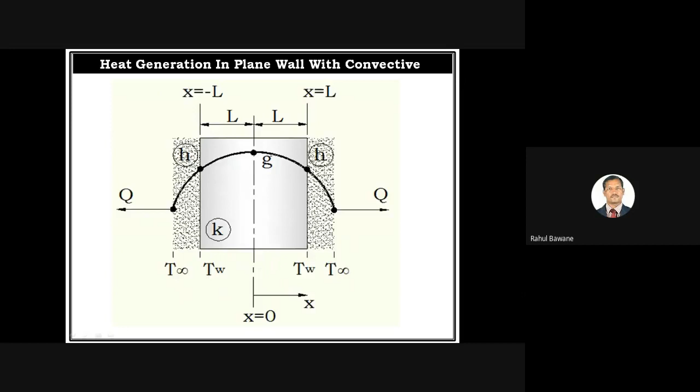Let's see now how to derive the equations, the mathematical expression, for such a condition. So this is our schematic. Now at the center, where we assume x is 0, the distance is 0.

So at the center, T will be maximum, because at the center only there is a heat generation source. At the source, temperature will be maximum, and from this source heat will convey out to the surrounding fluid. So the first part is conduction, then convection. On the right hand side also, the first part is conduction up to the surface, and then from the surface, convection.

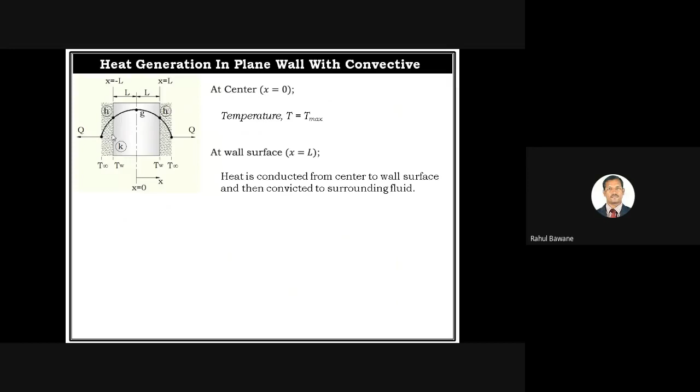So no doubt the temperature will be maximum at the source only. So at the center, where x is 0, temperature is T max, and at the wall surface — it may be either left or right side, at a distance L, so x is L distance on both sides — heat is conducted from center to wall surface and then convected to the surrounding fluid. So heat from the source is conducted throughout this slab and reaches the surface, and from the surface it is convected out to the surrounding fluid.

So at the wall surface, what is the condition? Heat conducted to the wall surface must be equal to heat convected to the surrounding. So for the conduction part, as we know, we use Fourier's law: minus Ka dt by dx at x equals to L. And for convection, we use Newton's law of cooling: Ha times Tw minus T infinity.

Now in case of a slab, whatever be the cross section area for heat flow is exactly the same as the area exposed for heat convection, so this A gets cancelled. So our final form will be: minus K dt by dx at x equals to L is equal to H times wall temperature minus T infinity.

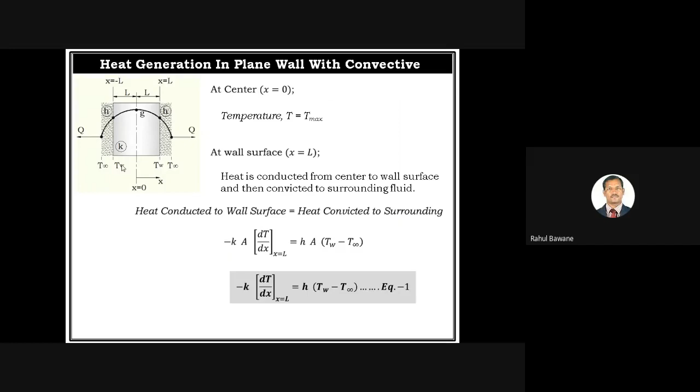Here we are not assuming left side or right side because both wall surfaces remain at the same temperature. So this is our equation 1.

Now in this, K is a constant, that is thermal conductivity, H is convective coefficient, T infinity is the surrounding fluid temperature. So we must find out the terms which are going to change condition to condition, that is dT by dx at x equals to L, and T wall surface. So we have to find out these two terms.

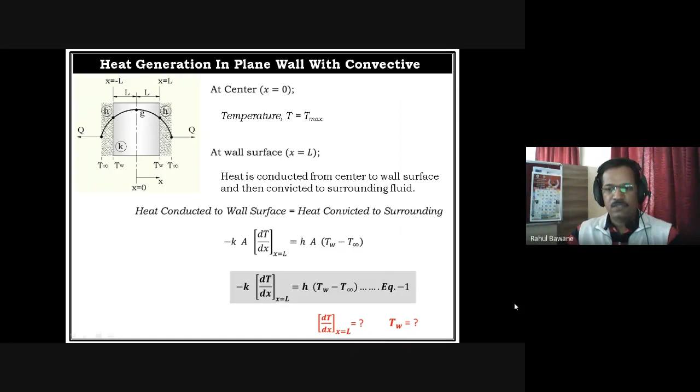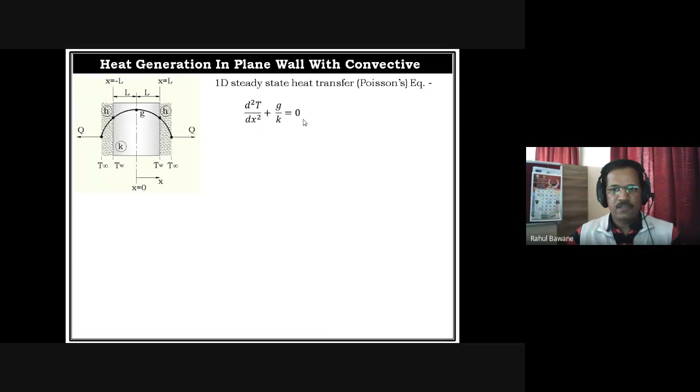Now as I said in the previous video, this portion as per university syllabus is covered only on the basis of one-dimensional steady-state heat conduction equation, that is Poisson's equation. So Poisson's equation is d square T upon dx square plus G upon K equals to 0. Why 0? Because steady state, so delta T by del of time will be 0, so everything becomes 0 in the three-dimensional heat conduction equation. One dimensional, so y and z terms are not considered, so our final one dimensional heat conduction equation is d square T upon dx square plus G upon K.

Now I will shift this term on the right hand side, so it becomes minus G upon K.

As I said, we must find out dT by dx at x equals to L and T wall. But right now what we have is d square T by dx square. So anyhow we have to convert this into dT by dx, and secondly T, that is for T wall.

So integrate this. On integrating, it becomes dT by dx, so the higher square term gets cancelled. So after integration of d square T upon dx square, it becomes dT by dx. On the right hand side, integration of this gives minus G upon K of x, and plus C1, constant of integration. So this becomes a dT by dx form, but still we have to find out the temperature form.

So again on integrating this equation, we reach this form. Integration of dT by dx becomes T equals to minus G by K, integration of x becomes x square upon 2, plus C1x plus C2. So this is C2, again a constant of second integration.

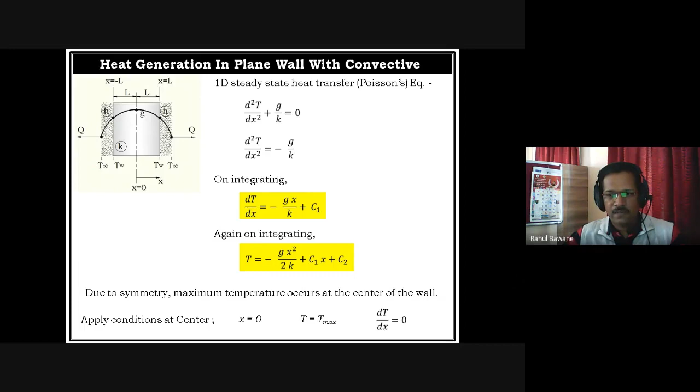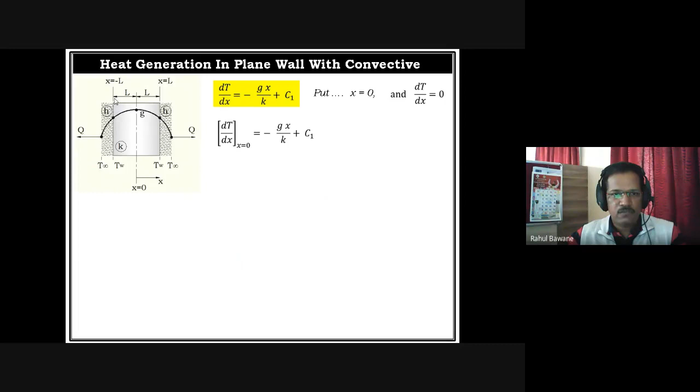So let's start. We have dT by dx equals to minus gx upon k plus C1. Put at x equals to 0, maximum temperature condition, dT by dx becomes 0. So dT by dx at x equals to 0, this is the notation we are considering, because dT by dx can be considered at surface also, where x equals to L. Right now we are considering x equals to 0. So dT by dx at x equals to 0 is equals to minus gx upon k plus C1.

Now dt by dx at x equals to 0, value is 0, that is the maximum temperature condition, is equals to minus x is 0 plus C1. So ultimately we get C1 equals to 0. We got the value of C1, numerical value, it is 0.

Now at center, when x is 0, dt by dx becomes minus gx upon k. Why? Because C1 is 0. If I put this C1 in our general equation, C1 becomes 0, so dt by dx will be only minus gx upon k. When I talk about center where x is 0, that equation becomes minus gx upon k at x equals to 0.

In the same way, at wall surface where x is L distance, I am not considering minus L or plus L, just a wall surface on left surface or right surface. So when x is L, what happens to dt by dx? dt by dx at x equals to L will be minus g. We are replacing the x term by L only, so gL upon k. This is the dt by dx at x equals to L.

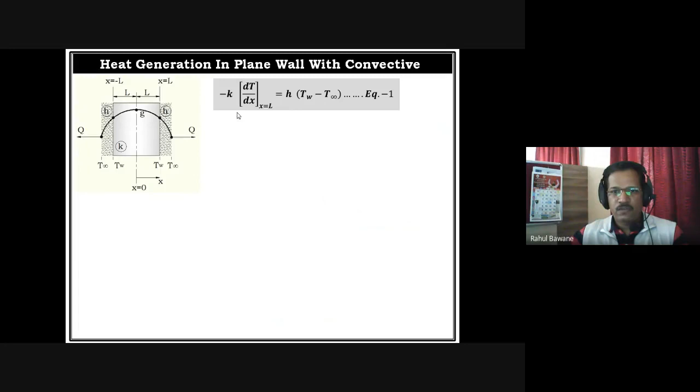So we are not finding at center, we are finding at x equals to L. So wall surface is minus GL square upon 2K plus C2. Now our general equation, where we find out value of dt by dx at x equals to L and T wall, put these values. So the equation becomes minus k in bracket, dt by dx value at x equals to L is minus GL upon k, equals to H, and this is whole bracket. In this stands for T wall minus GL square upon 2K plus C2 minus T infinity.

Now we already find out the value of C1, that is equals to 0. We have to find out the value of C2 now, in terms of any numerical value or in terms of other parameters which will be provided in numericals. So if I shift and rearrange this, minus minus becomes plus, so k GL upon k, k will get cancelled. H here, bracket remains as it is. Now I am shifting this H to left hand side, k gets cancelled, so it remains GL upon H equals to minus GL square upon 2K plus C2 minus T infinity.

We are interested in finding C2 value. So shifting everything, this whole minus term, if I shift it to left hand side, it becomes plus, and minus T infinity shifted, it becomes plus T infinity. So we get the value of C2 in terms of other parameters. C2 will be GL upon H plus GL square upon 2K plus T infinity. This is the value of C2.

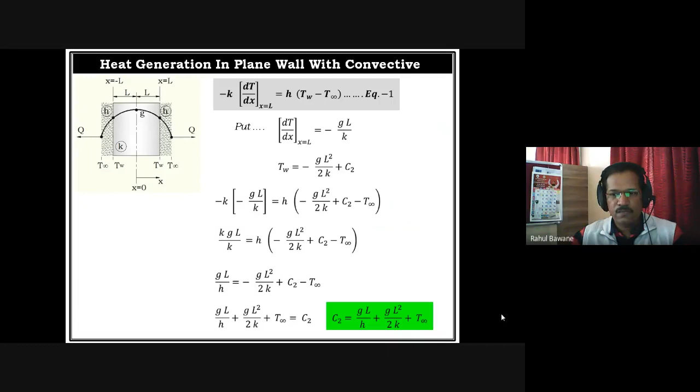Now we know what is the value of C1 and C2. So our temperature profile in terms of constant of integration C1 and C2, this is our temperature profile. This equation belongs to this curve. This is called the temperature profile equation T.

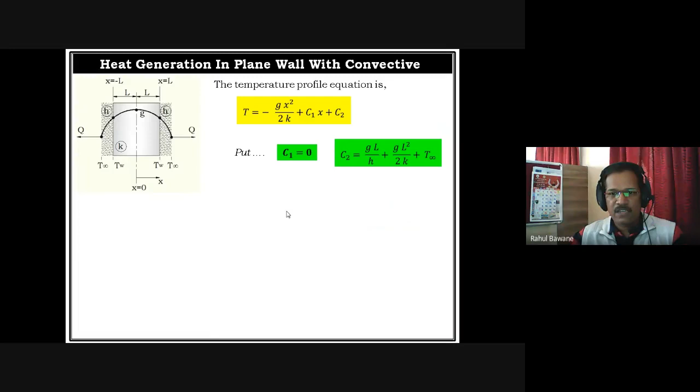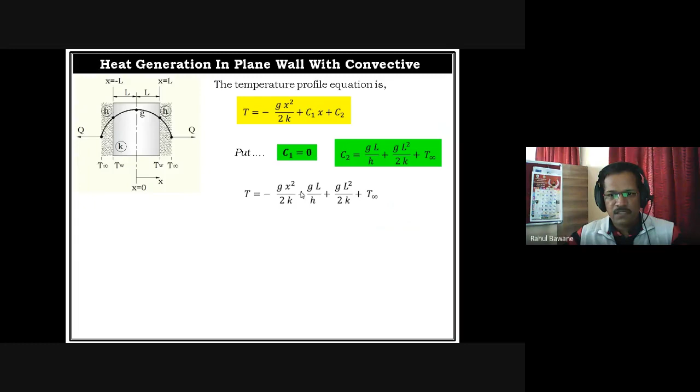Now we have to put the value of C1 equals to 0 and C2 equals to this in our temperature profile equation. So our temperature profile equation, where minus gx square upon 2k remains as it is. If C1 becomes 0, the whole middle term becomes 0. Then C2 plus GL upon H plus GL square upon 2k plus T infinity.

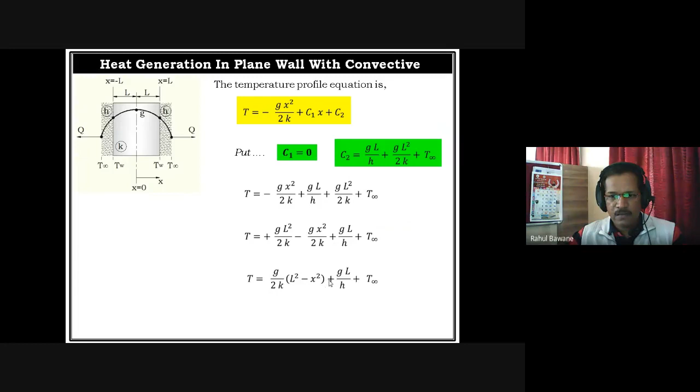Now rearranging this, I shift this term to the first position, minus of this x square term, plus GL upon H plus T infinity. Now in these first two terms, G upon 2k can be taken common and taken out. So it becomes G upon 2k times (L square minus x square) plus GL upon H plus T infinity. So this is our required temperature profile equation. This is our standard equation where there is no term of C1 and C2. So we ultimately succeed to remove out the C1 and C2 constant terms.

So our final temperature profile equation will be T equals G upon 2K times L square minus X square, plus GL upon H plus T infinity. This equation is used to calculate the temperature at any distance within the slab.

So if X is 0, we find out the temperature at the center. If I put X equals to L, then it will give the wall temperature. If I put some value of X, we will get the temperature at that particular X value within the slab.

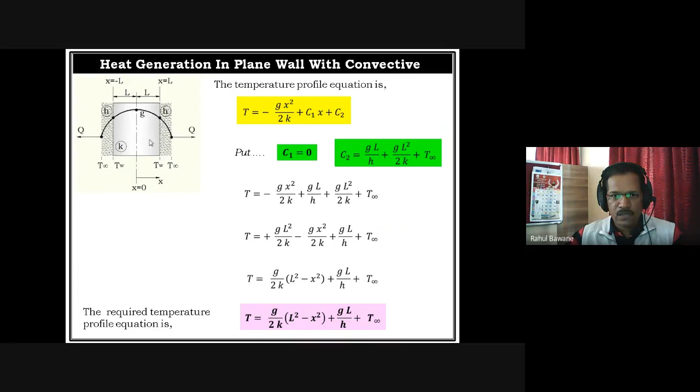So let's move ahead. The temperature profile equation we obtained is for cases where a symmetry temperature profile exists. At center, when X is 0, temperature becomes T center, and we know that at symmetry, T center will be T max. But this is not happening in all cases — this is only possible when the heat generation source is exactly at center and we get a symmetry temperature profile.

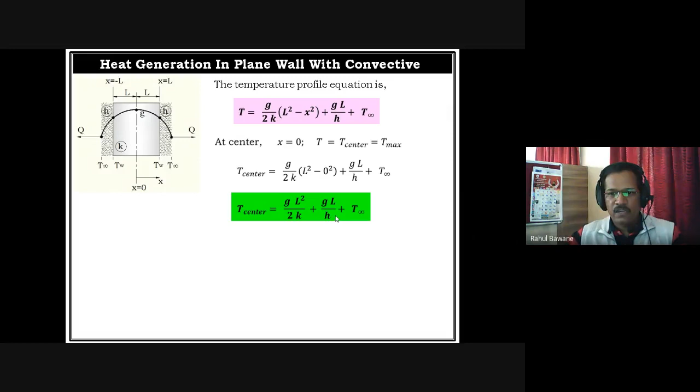So T center or T max occurs when X is 0. I put the value of X, so it becomes 0 square. Finally I get T center or T max equals GL square upon 2K plus GL upon H plus T infinity. Now what happens when I put the value X equals to L?

At surface, temperature becomes T surface or T wall, TW. So when I put X equals to L in our main equation, TW becomes G upon 2K times L square minus X replaced by L, so it becomes L square again, plus GL upon H plus T infinity. So L square minus L square, this whole term becomes 0. So T wall is 0 plus GL upon H plus T infinity.

So the final mathematical expression for wall temperature or surface temperature in case of symmetry is T wall equals GL upon H plus T infinity.

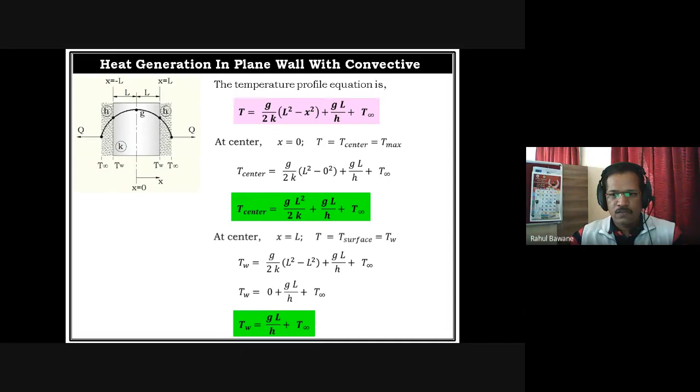So either you remember these two separate equations, or remember only the main equation and just replace the value of X. If you are interested in finding T center, replace X equals to 0. If you want to find the temperature at wall, replace X equals to L. So definitely you will reach this final form. Okay, so let's move ahead now.

Now we will see two numericals at different conditions. First numerical, the basic one: a plane wall of thickness 0.2 meter and thermal conductivity 20 watt per meter Kelvin generates heat at 50 kilowatt per meter cube of volume when an electric current is passed through it. The convective heat transfer coefficient on each side of the wall is 10 watt per meter square Kelvin. Consider steady state condition, take surrounding temperature to be 25 degrees centigrade, and it is asked to determine the surface temperature and the maximum temperature in the wall.

Okay, so it is said that same H value, convective coefficient, and same surrounding temperature — that means we obtain symmetry. So whenever we obtain a symmetry temperature profile, we consider thickness equals 2L. So 2L is 0.2 meter. If 2L is 0.2 meters, what is the value of L? It is 0.1 meter.

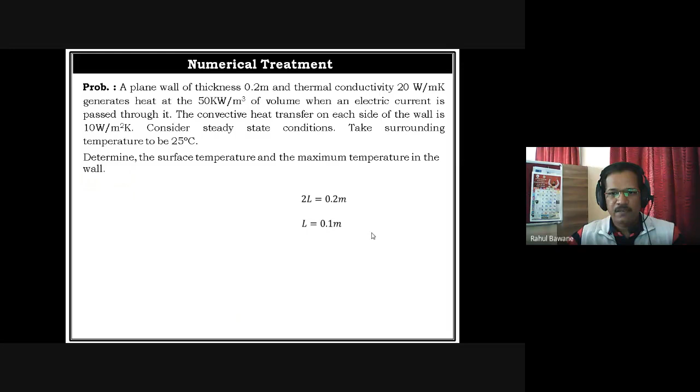Now next, thermal conductivity is given as 20 watt per meter Kelvin, heat generation rate 50 kilowatt per meter cube. Remember, we must convert this to 50,000 watt per meter cube — always convert kilowatt or megawatt into simple watt per meter cube. H value is given as 10 watt per meter square Kelvin and surrounding fluid temperature 25 degrees centigrade. So we have to find out T wall and T max.

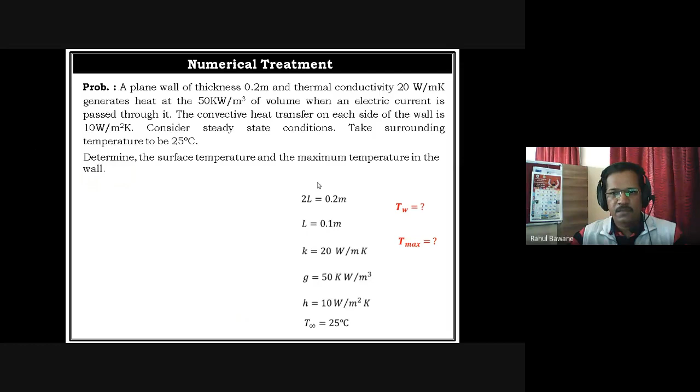According to our statement, our schematic will be like this, and it is always better to draw a schematic as per the numerical given. So this is a symmetrical temperature profile. Now in this numerical, it is not asked to derive the formula used.

If it were written like that, then we would have to first derive the formula for T wall and T max, just as we derived it right now in previous slides. Likewise, those steps would be included in our answer first, and then we would put in the values and find the numerical value for T wall and T max.

But it is not said like that. Even though if this question is asked for 8 marks or 10 marks, then also, even though it is not written 'derive the formula you used,' we have to derive it, because otherwise it becomes very easy to find out T wall and T max, and that would only be a 2 marks question. But if it is asked for 8 marks, that means it is presumed we have to derive the formula.

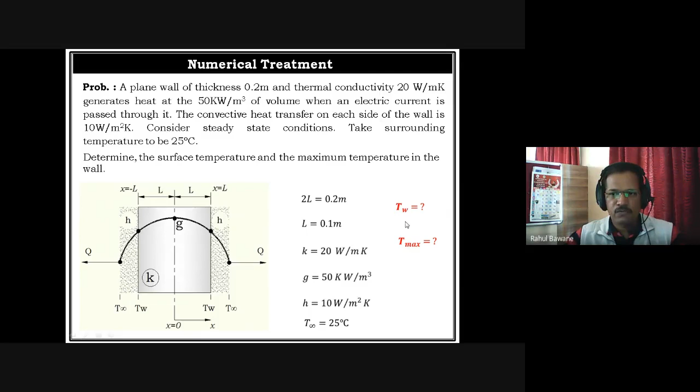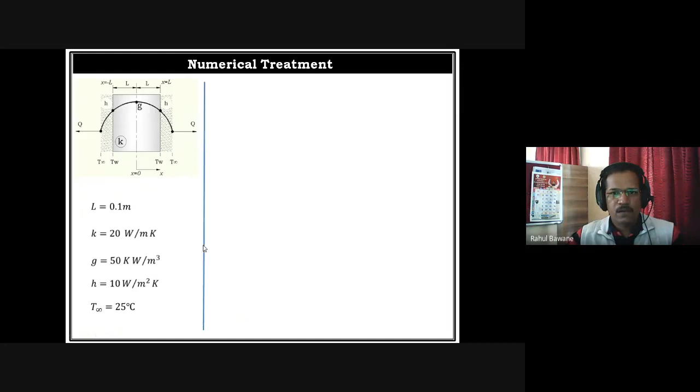So let's start to solve this numerical. This is our schematic and these are our given data. We know that this is our basic equation for symmetric profile.

T equals G upon 2K in bracket L square minus X square, plus GL upon H plus T infinity. Either you remember this main form only, or you remember this one: T max or T center will be this, and T wall will be this.

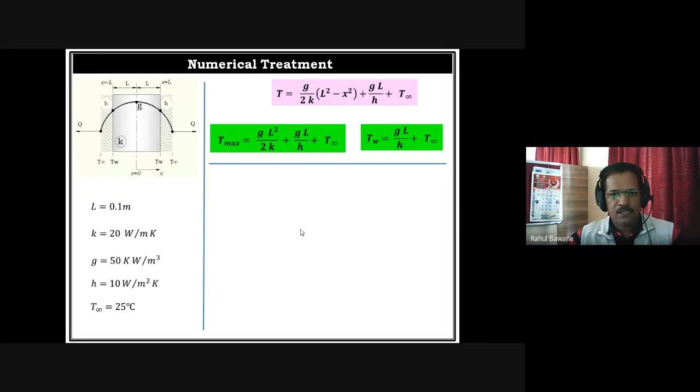Now shift to our task. It is asked to find surface temperature of the plane, that is T wall. We know that surface temperature of plane when symmetry is there, so T wall is GL upon H plus T infinity. We are directly using this formula because it is not asked to derive it.

So T wall, put all the values of these terms. T wall will be 525 degrees centigrade. This is our first answer. If wall temperature is 525, then no doubt source temperature or mid temperature T max must be higher than 525.

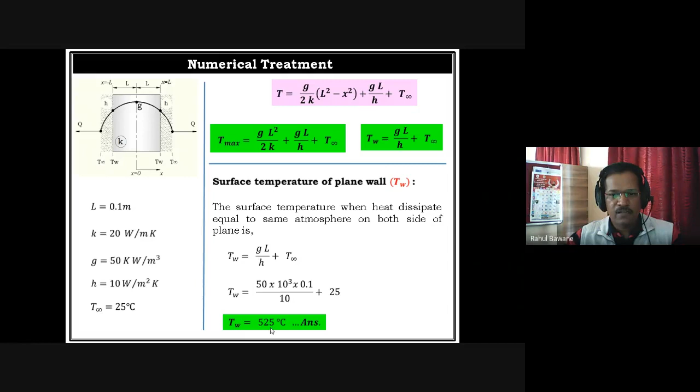Now second value, maximum temperature in the plane wall. Definitely maximum temperature is obtained at x equals to 0. So if I put the value x equals to 0 in the main equation, we come to this final form: T max is GL square upon 2K plus GL upon H plus T infinity.

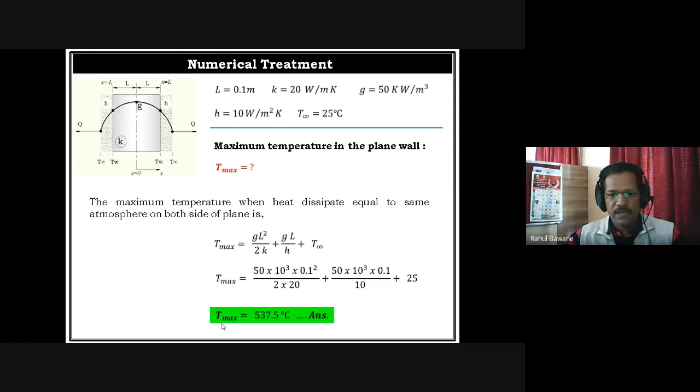Put the values of all these parameters which are given in the data. But remember, G is in kilowatt per meter cube, so here I am putting watt per meter cube, basic units. So we get the value T max equals 537.5 degrees centigrade, higher than T wall surface. This is our answer for T max.

Now imagine this is our last numerical, where I try to cover maximum points in a single numerical, so there's no need to go for a number of numericals. So in this numerical, this will be the last numerical for today's video.

In a thick infinite slab of thickness 20 centimeters, the temperature of fluid on one side is 30 degrees centigrade and on the other side 20 degrees centigrade. So friends, that means both side environments have different properties: one side 30 degree temperature, second side 20 degrees temperature.

The heat transfer coefficient on the hot side is 20 watt per meter square Kelvin, and on the cold side it is 40 watt per meter square Kelvin. That means both side fluids are different, both side fluid temperatures are different. So wall surface temperature cannot be identical, just like in the previous numerical, but the concept remains the same.

The conductivity of the slab material is 20 watt per meter Kelvin. The heat generation in the slab is at the uniform rate of 5 kilowatt per meter cube. Again, this G value is given in kilowatt; we have to convert it into watt per meter cube.

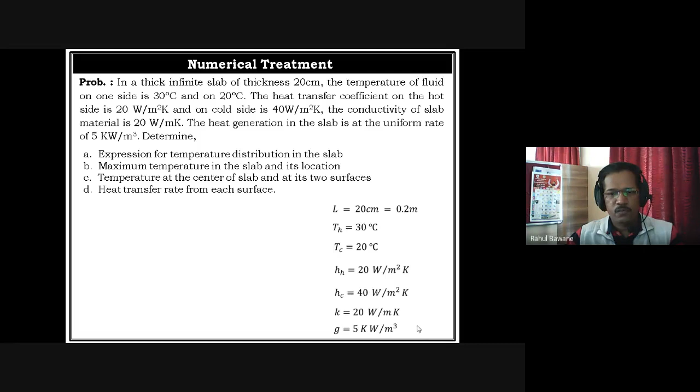Convective coefficient of hot fluid is 20, then for cold fluid it is 40, then thermal conductivity is 20 watt per meter Kelvin, and heat generation is 5 kilowatt per meter cube. If I try to draw a schematic for our diagram statement, it will look like this.

Heat generation source within the slab, but it is not exactly at the center, remember. So X is not 0 at midway; it may be anywhere, we don't know, but we will calculate where it lies, and definitely it will lie at the maximum temperature point. As it is not a symmetry case of temperature profile, we assume X is 0 at the left face, so all the thickness is along the positive direction. So when it reaches the second surface, thickness will be X equals to plus L.

Now hot fluid, H of H, hot fluid temperature TH. So when heat travels from source to the left face, then according to the surrounding fluid there will be a resistance, and according to that temperature will drop. And on the right face, when it conducts to the right face and then dissipates to colder surrounding fluid HC, the temperature profile will be different. So on both sides the heat transfer rate is not the same. On this side Q1 is the heat transfer rate, on this side Q2 is the heat transfer rate.

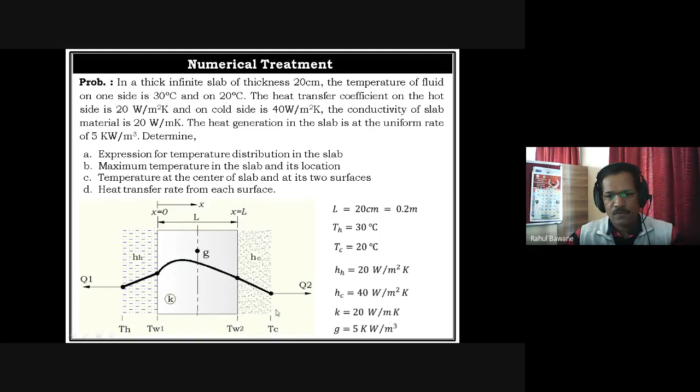Okay, so this is our schematic as per the diagram statement. So the schematic is given, we have to find out the temperature distribution in the slab. So it means we have to find out the equation for this curve, that is the T equation.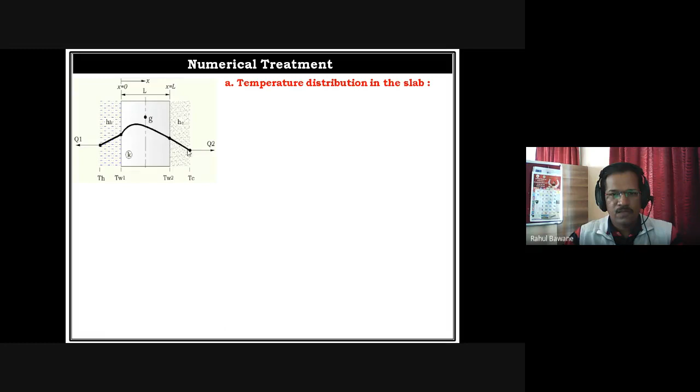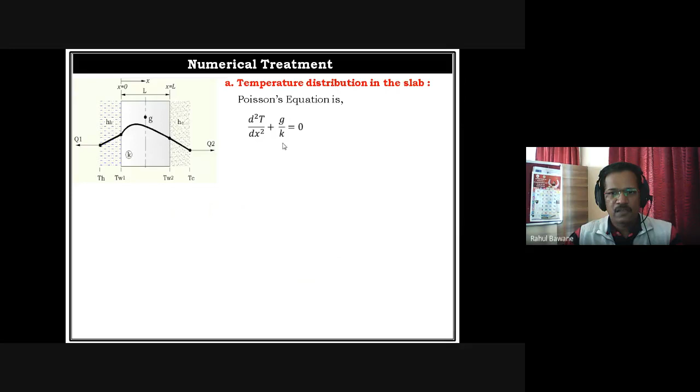Let's start with Poisson's equation: d square T upon dx square plus g upon k. So I shift this, on the right hand side it becomes minus, then on integration we get dt by dx in terms of C1, the constant of integration. Again on integrating we get the temperature profile equation in terms of C1 and C2.

So these steps will be common in each condition, and we have to find out the C1 and C2 values for this situation which is asked in our numerical. Once we get the value of C1 and C2, that becomes our temperature profile equation. So our task is to find out C1 and C2.

Okay, now we have two conditions. In the previous numerical or concept we had two conditions: at the center where T becomes T max, and at the surface. But right now at the center it is not the T max condition, so we don't know where it is lying. So it is not a symmetric profile.

So we have two conditions: either on the left face where heat is conducted and convected to hot fluid, or on the right face where heat is conducted and convected out to cold fluid. So these are the two conditions. At the left face we assume X is 0.

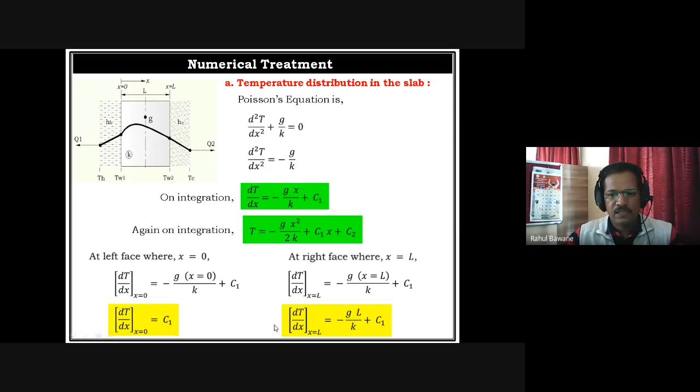Now at the right face where x has a value of L, we put x equals to L. So our final form of dt by dx at x equals to L is minus gL upon k plus C1. Remember, this time C1 is not 0 - it has some value at the left face and some value at the right face. So C1 is dt by dx at x equals to 0 at the left face, and at the right face we got this value. So we have both the dt by dx at left and right face.

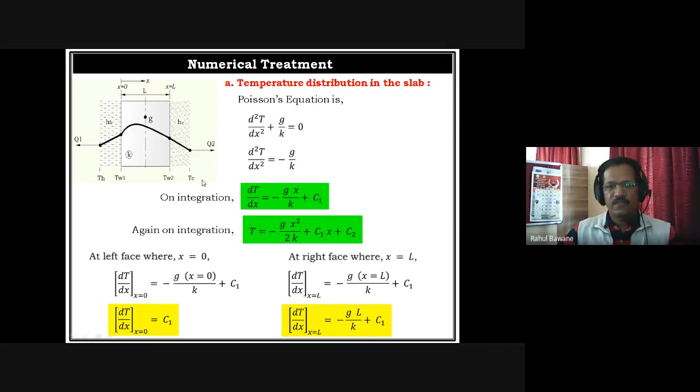Now we have these two equations. At the left face where x is 0, using the temperature equation, if I put the x value as 0, so G times 0 square plus C1 times 0 plus C2.

So likewise I get the value of T wall 1, the left face wall temperature. T wall 1 equals to C2.

Now at the right face where X is L, using the temperature profile equation, replacing X by L, we get T wall 2 equals to minus GL square upon 2K plus C1 L plus C2. So likewise we find out dt by dx at x equals to 0, T wall 1, then dt by dx at x equals to L and T wall 2. So for the left face condition we find these two values, and for the right face condition we find these two values, correct?

Now applying the boundary condition at the left face. So what is the boundary condition? It says whatever heat is generated from the source will conduct through this slab, reach the surface, and then convect out, correct? So the rate of heat conduction at x equals to 0 is equal to the rate of heat convection at x equals to 0. What is x equals to 0? That means the left face, we are talking about the left face. So heat conduction - now why do we put this plus sign?

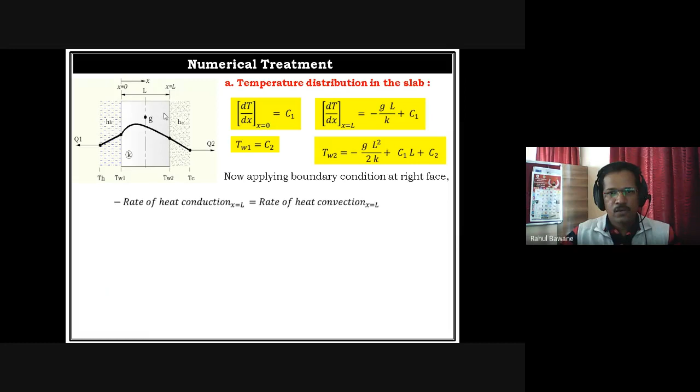Now we have all these four things. Now applying the second boundary condition, that is the right face. At the right face, minus rate of heat conducted. So the conduction part is negative at x equals to L, and rate of heat convection at x equals to L. So our equation becomes minus k dt

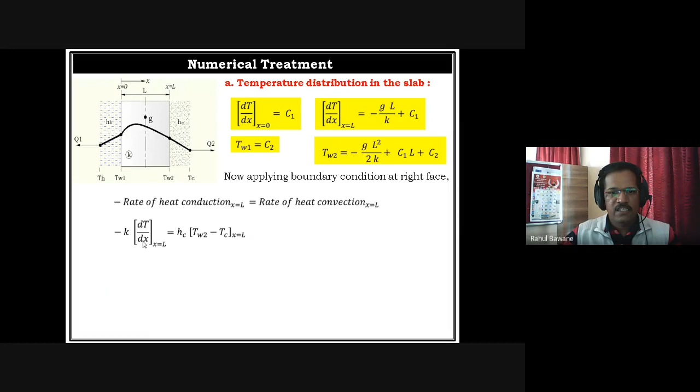is equals to Hc, cold fluid, Tw2 minus Tc. Why minus sign? Because now heat is conducted along the direction, and as the thickness increases, my temperature gradient becomes negative, and to

compensate that negativity I have to use a minus sign in Fourier's equation. Now simplify this. Dt by dx at x equals to L, we got this value minus GL upon K plus C1, and for T wall 2 we have this value. So replacing this, now simplify this equation.

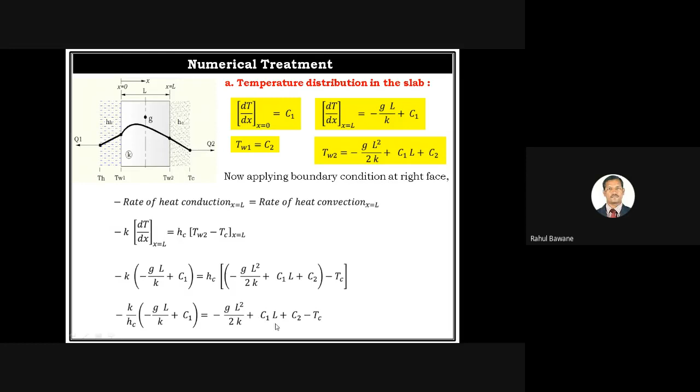So if I multiply, if I shift this Hc on the left hand side, it becomes minus K upon Hc in bracket minus GL upon K plus C1 is equals to all these terms: minus GL square upon 2K plus C1L plus C2 minus TC.

Now we have this equation. We now move this term into the bracket, so minus minus becomes plus. K gets cancelled, so it remains GL upon Hc minus K upon Hc of C1 is equals to all these terms.

Now put the value of C2. C2 we got as K upon Hh, C1 plus Th when we applied the condition at the left face. So we are replacing C2 by all these terms in terms of C1. So our equation becomes like this, where now only C1 remains.

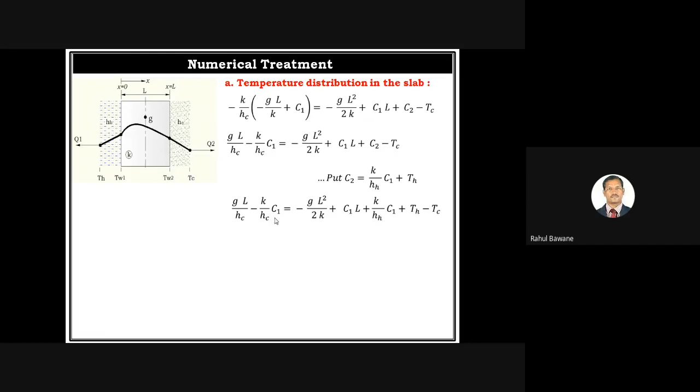We are going to find out the C1 value, so rearrange everything to reach the final form of C1. Here we are shifting this negative term GL square upon 2K to the left hand side, so it becomes positive GL square upon 2K. This term GL upon Hc remains as it is.

C1, we are shifting C1 to the right hand side, so we are shifting all C values to the right hand side. Then this minus TC, if I shift it to the left hand side, it becomes positive. If I shift positive TH, it becomes negative. And rearranging so that we get all C1 terms on the right hand side.

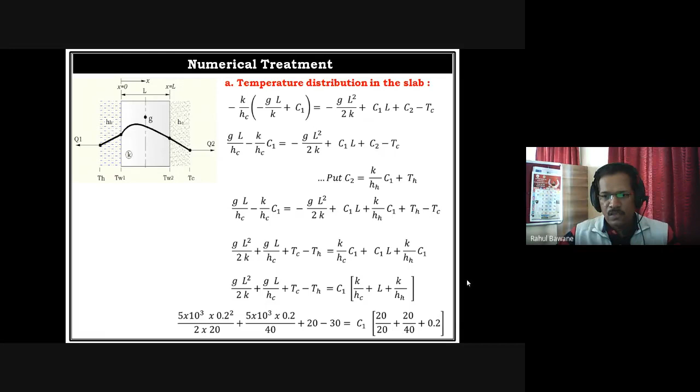Okay, now move ahead. If I take C1 as common, so I got a bracket K upon Hc plus L plus K upon H of H. Now put the value, as this is a numerical, so I am putting the value of each and every term. Only C1 remains unknown, so if I put the numerical values, this is the final form.

So C1 will be 11.76. This is the numerical value of C1. Now to find out C2, we know the relation between C2 and C1, so put the value of everything including C1 as 11.76. So we got a numerical value for C2, 41.76. Now we have the constants of integration, C1 and C2, as numerical values.

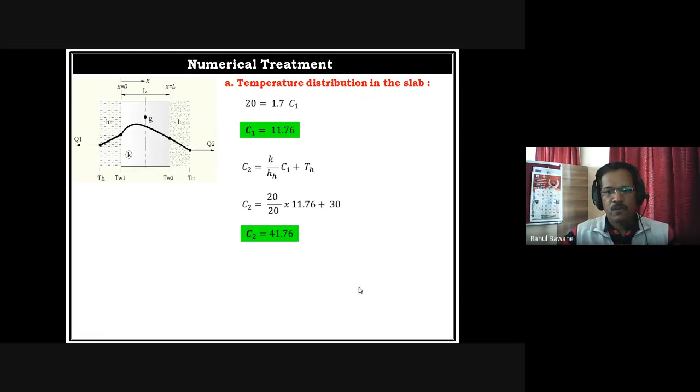So let's put this back into our main temperature distribution equation. So this is our final temperature distribution equation for the given numerical: T equals to minus gx square upon 2k plus 11.76x plus 41.76. This is the temperature profile equation for this particular given numerical.

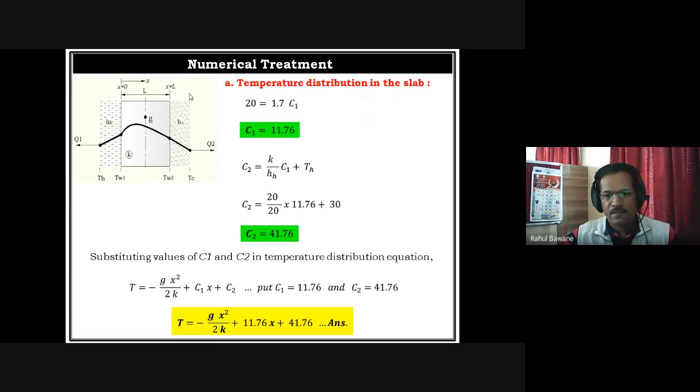So this is the first part. Now the second, B, maximum temperature in the slab and its location.

So we have a temperature profile equation. This is for our statement: 11.76x plus 41.76, when we replace the C1 and C2 value. So this is our temperature profile equation.

Now apply the maximum temperature condition. We don't know where it lies, it is not symmetric. But we know the maximum temperature condition is dT by dx, differentiate temperature with respect to x and equate to 0. This becomes the maximum temperature condition. So we apply this condition.

So d by dx of total T value, minus gx squared upon 2k plus 11.76x plus 41.76, equate to 0. After differentiation, we get minus 2gx upon 2k plus 11.76. Derivative of x is 1 and this constant becomes 0. So we got this final form, Gx upon K.

I shifted this to the right hand side, so it becomes positive. So Gx upon K equals 11.76. Now I have the value of G and K, so put the values of G and K. I get the answer for location x equals 0.047 meter. So this is the location where we obtain maximum temperature.

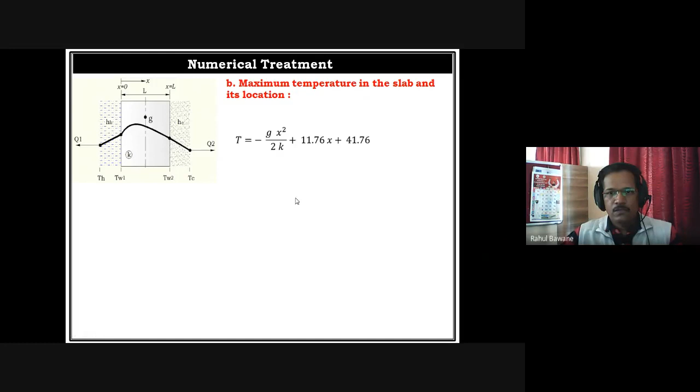So T equals to, now this is our general equation. We know T becomes maximum at x equals 0.047 meters. So I am just replacing the x value by this. So temperature becomes T max. Put all the remaining parameters' numerical values. So T max will be 42.037 degrees centigrade. So this is the T max value.

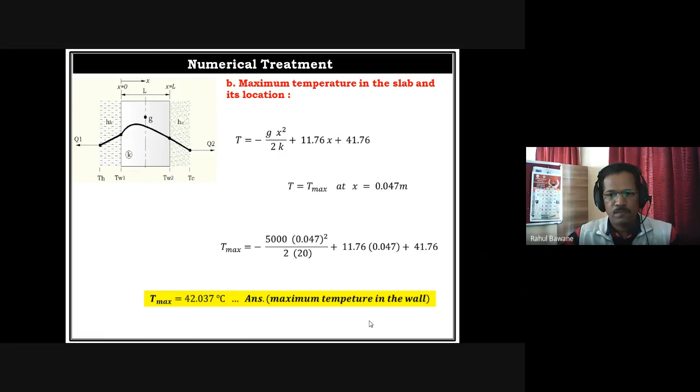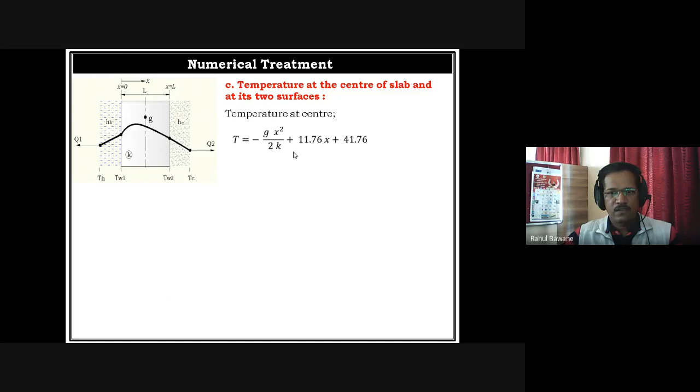Now move on to the third part, that is temperature at the center of the slab and at its two surfaces. So center of slab, T center. We know the temperature profile equation for this numerical. Now where do we obtain T center? T center will be at L by 2, because total length is L, the slab thickness. So center will be at x equals L by 2.

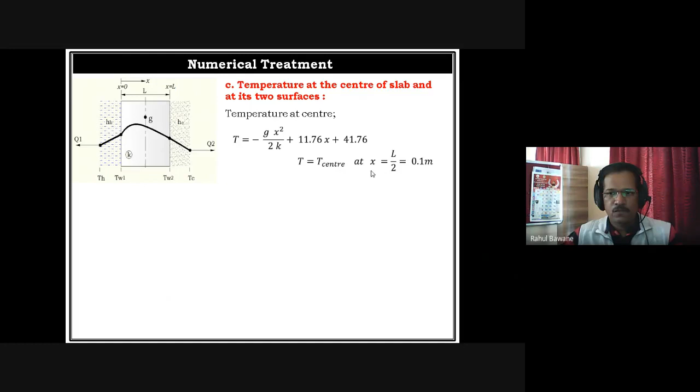So it is 0.1 meter. When x is 0.1 meter, we get the temperature T center. Put all the numerical values in the temperature profile. So T center will be 41.69 degrees centigrade.

Now wall surface TW1 and TW2. So temperature at the left face, where x value is 0, becomes T wall 1. Put x equals 0 in the temperature distribution equation and put the other numerical values. So our temperature, T wall 1, is 41.76 degrees centigrade.

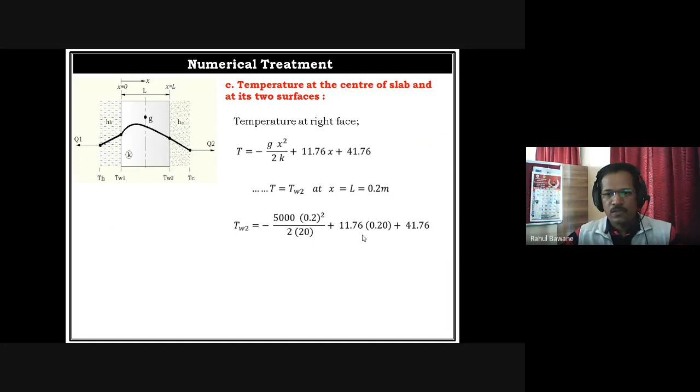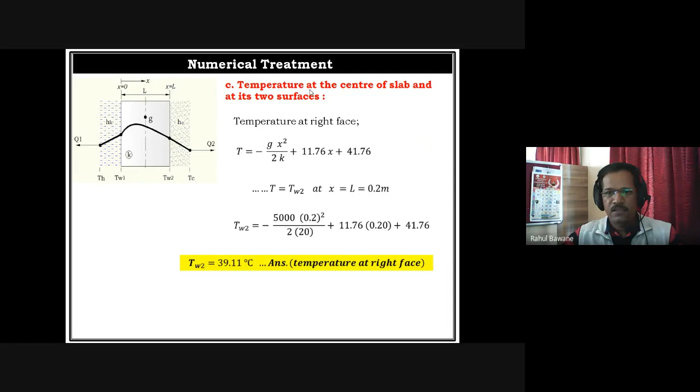Now at the right face, temperature at right face, this is our temperature profile equation. At the right face, when x equals L, and it equals 0.2 meter, then we get the temperature equals T wall 2. Put the numerical values. So T wall 2, that is TW2, is 39.11 degrees centigrade. So this is the answer of part C, temperature at the center of the slab and its two surfaces.

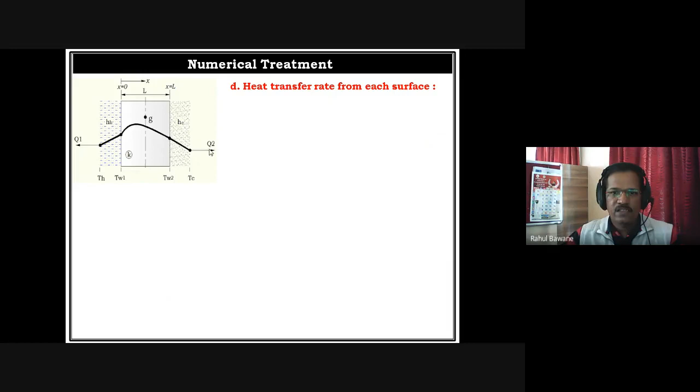Now the final question, heat transfer rate from each surface. As the schematic shows, each surface has a different heat transfer rate. At the left face where x is 0, heat transfer rate is Q by A at x equals 0, and we use Newton's law of cooling. So Q by A at x equals 0 is h times TW1 minus T infinity.

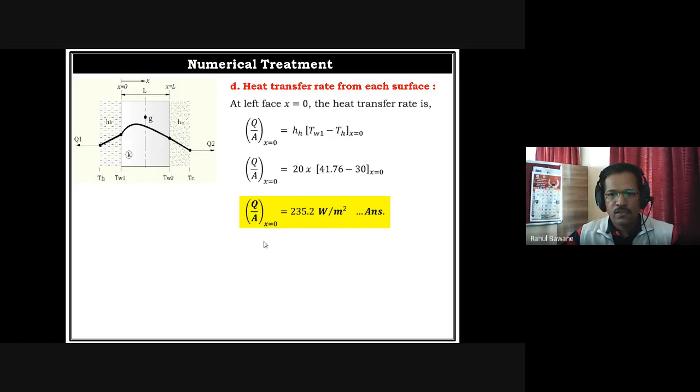Put the values: h is 20, TW1 we got the value 41.76, T infinity is 30. So Q by A at the left face becomes 235.2. So this is the value of Q1.

Now at the right face, sorry, by mistake it was again printed as left face. So at the right face where x equals L, using Newton's law, h of C times T wall 2 minus Tc at x equals L, we get 764.4 watts per meter square. This is Q2.

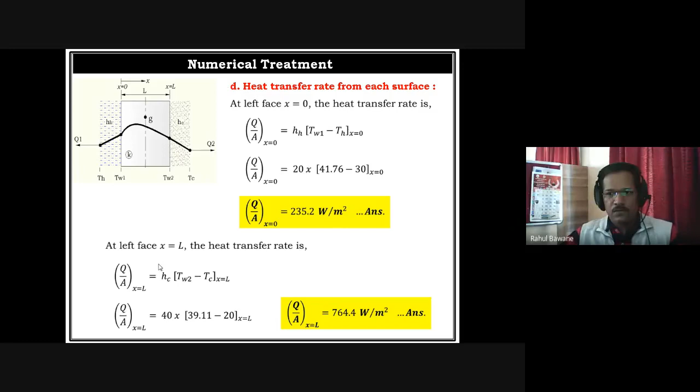So this way all the questions A, B, C, D are solved. So this is the end. For today's lecture, we have to just remember that we must find out the C1 and C2 values so that we get our final temperature profile equation. And according to the conditions we have, if we put the conditions in the corresponding equation we obtain, for center temperature, maximum temperature, or wall temperature, we can accordingly solve the numerical. So thank you, we will see some...